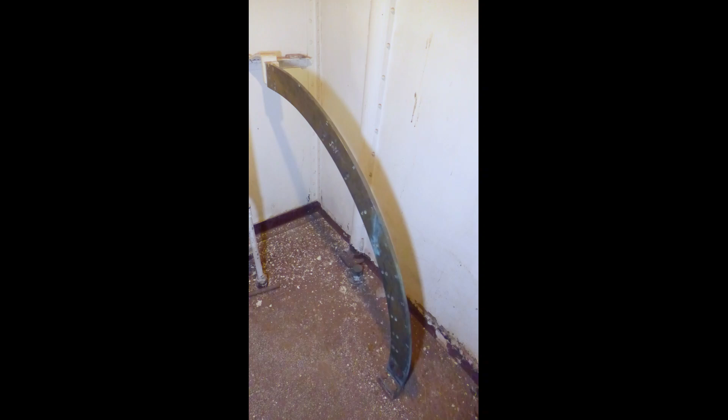So you were asked what the heck this arch was for. Out of the many guesses we received, 2 were correct, and they were spaced very closely together. The first correct one came from Dominic Bosco, so attaboy, Dominic.

Before we dive into this, our goal is to provide a relatively simple description of a very complicated system. This means that we have chosen to disregard a number of fine points such as the effects of temperature and salinity on the density of water. Even though an engineer may be able to pick this apart, keep in mind that most folks aren't really interested in extreme detail, just a general idea of how it worked.

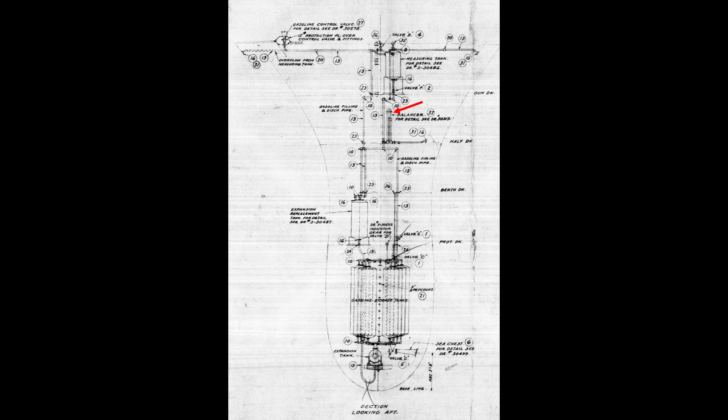The arch was part of a device called a balancer that in turn was part of the hydraulic gasoline fueling system installed in 1925 for the aircraft. The balancer's function was to correct for differences in fuel density made necessary by the way the system worked.

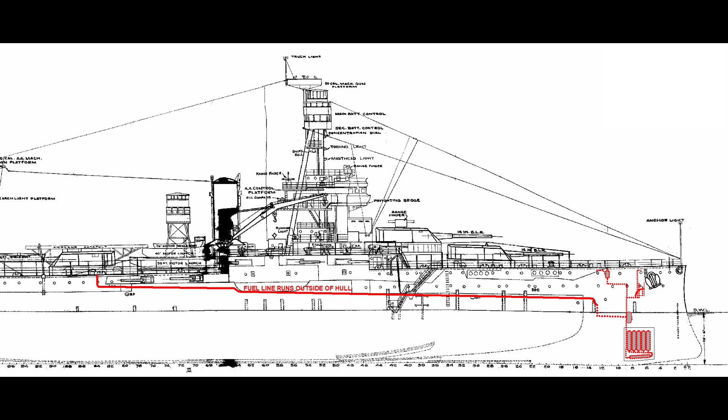This was an extremely clever system that used the weight of water to push gasoline through pipes from tanks located close to the ship's bow to an outlet beside Turret 3 where it was used to fuel aircraft. It took advantage of 2 basic characteristics of gasoline and water. First, gas and water do not mix, and second, water is heavier than gasoline. While the system and its piping was very complicated, its operating principle was quite simple.

Gasoline is stored in tanks close to the bottom of the ship. Any empty space in the tanks is filled with water that also fills all of the pipes above the tanks. At the top of the system was a measuring tank. If you wanted to pump 100 gallons of gas, you put 100 gallons of water into the measuring tank. You then open valves and the weight of the water pushed through the pipes into the bottom of the gas storage tanks where it would push the gas up and out through supply lines.

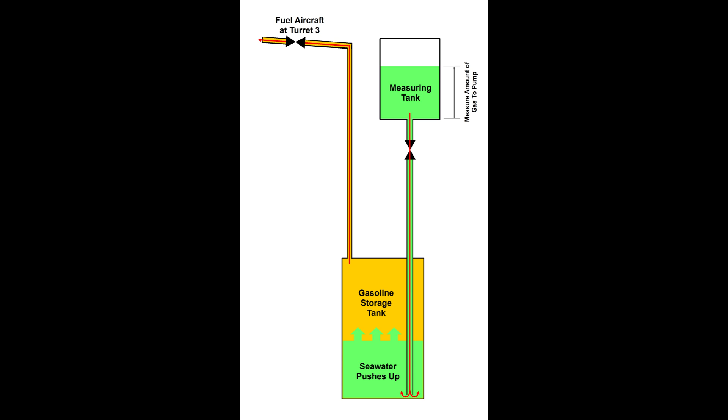Why go to this effort when it would be easy to take a very safe pump and simply suck the fuel out? Gasoline was almost certainly the most dangerous substance stored on the ship. It's far more flammable than fuel oil, and its vapors are extremely explosive. This system kept the tanks and pipes either full of gas or water or both to eliminate empty spaces where explosive vapors could form.

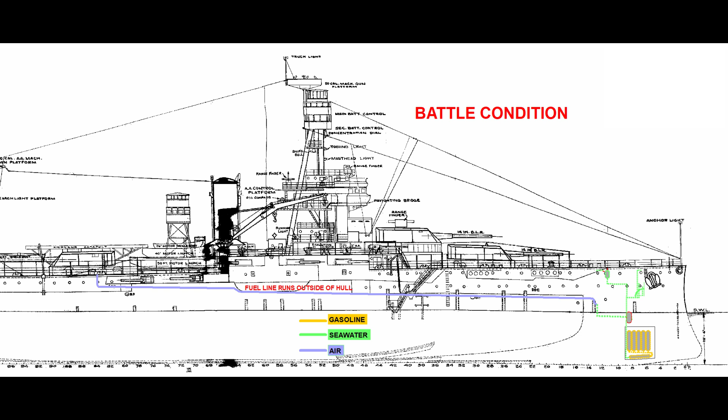For ultimate safety and when setting for battle conditions, they would drain the long fuel line that ran outside of the hull and pump water backwards through the pipes to clear them and push gasoline back into the 12 cylindrical storage tanks. The tanks would then be closed off to isolate the gasoline and protect the ship.

A final protective step was taken. The 12 tanks were located in what was originally a forward trimming tank. Prior to going into action, they flooded that compartment so that the gas tanks were completely immersed in seawater, eliminating the possibility of a gasoline explosion or fire if a tank or a fuel line was ruptured.

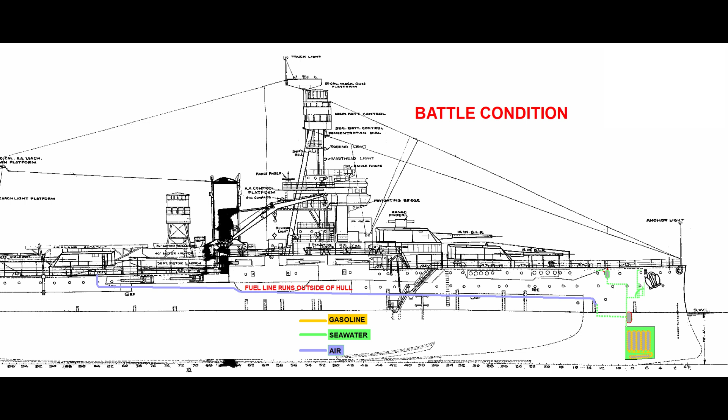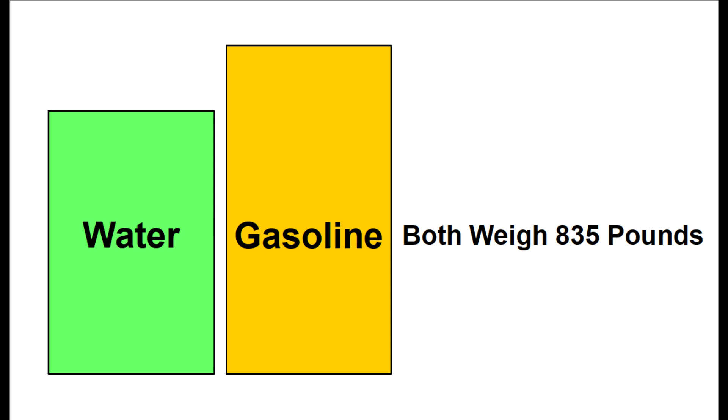So what about the arch and balancer? What did they do? As we said before, gasoline and water will not mix. Since gas is less dense, it will float on top of water. The density of gas also varies by grade or octane rating and manufacturing variations. So there has to be a way to adjust the system to correct for changes in gasoline density.

Here's the basic problem. Let's say that you want 100 gallons of gas, so you use 100 gallons of water to push gas out of its storage tank and through a pipe. What you are doing is using 835 pounds of water to push against the fuel. A little math work tells us that the resulting 835 pounds of gasoline measures out to about 133 gallons, so you end up with 33 gallons more than you want. So in order to set 100 gallons of water so that it will deliver 100 gallons of gasoline, the amount of water has to be reduced by a measurable amount.

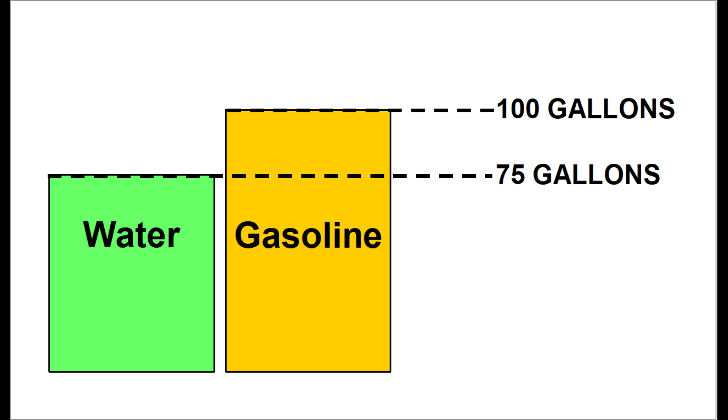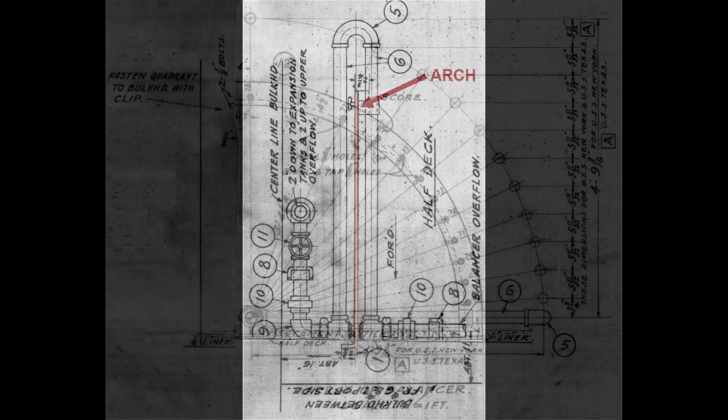The actual balancer is made from a pipe shaped like an inverted U and mounted on swivels that allow it to rotate. Unwanted water could be drained through it to reduce the amount of water used to push against the gasoline. By swiveling to adjust the tilt or height of the loop, it increases or decreases the amount of water in the system, meaning that it can be used to correct for changes in gasoline density and deliver the desired amount of gasoline.

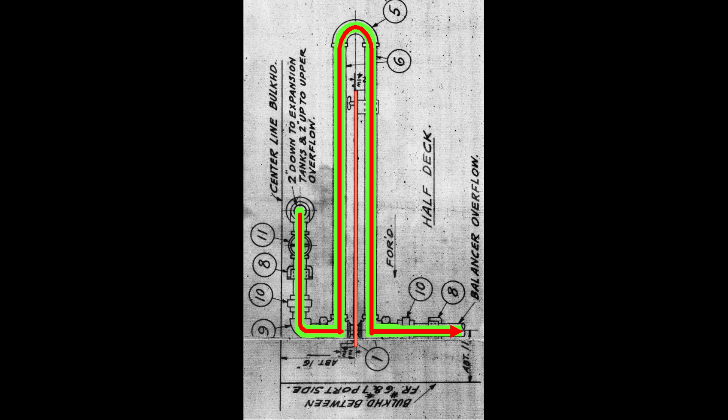Since a decrease in specific gravity of gas increases the amount of it you end up pumping, you need to set the angle of the balancer to a lower angle to drain off more water. The numbers on the side of the arch allow you to set the balancer for the exact density of the gas being pumped. Here we can see the difference in the loop's height when it is set for 0.78 and then again at 0.71.

Think of them as two different settings for a dam spillway. You can see that changing from one to the other will clearly change the amount of water allowed to drain out of the system.

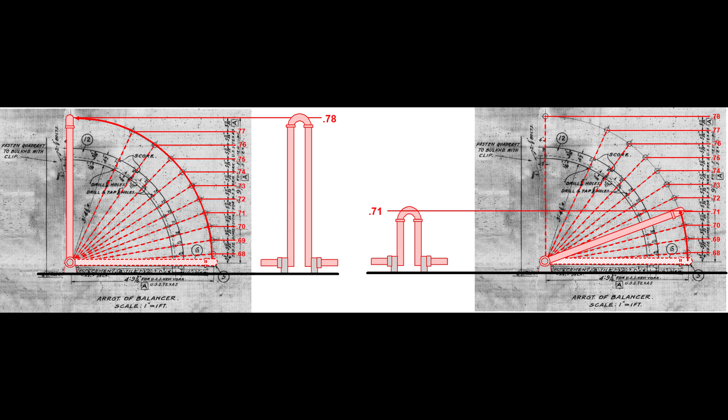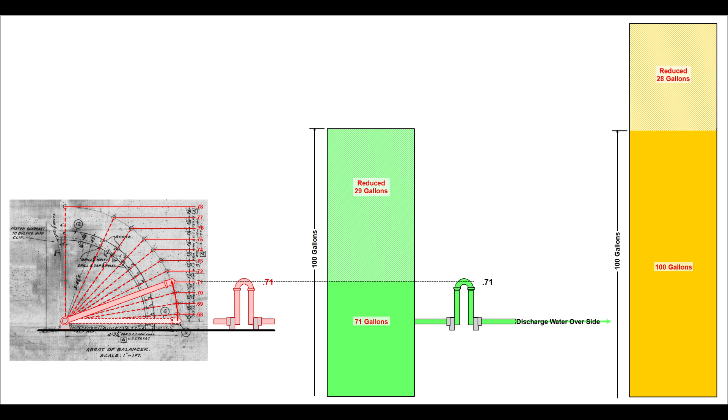The system was extensively modified prior to World War II. While we haven't seen any documentation that tells us why it happened, a couple of reasons come to mind. As a gravity feed system, it would be impossible to pump gas to a level above the balance tank. This would include something like the wing tank of an airplane sitting on top of turret 3. It is also likely that it pumped at a fairly slow rate. The original solution prior to the modification was likely a portable booster pump at the turret end, but there were risks involved with that.

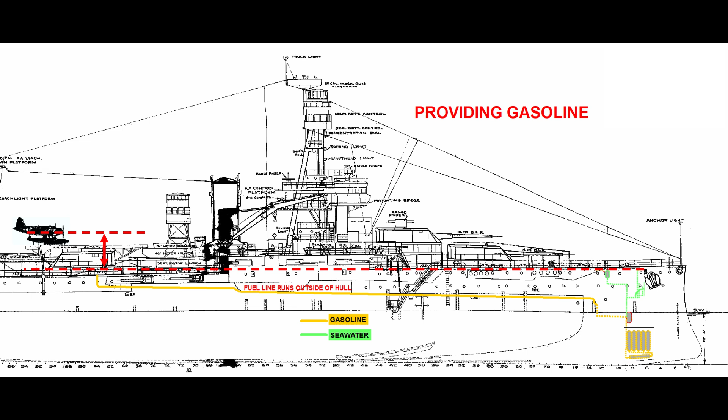Beginning sometime around 1940, the measuring tank was removed and a booster pump was installed. A booster pump could deliver fuel faster and could pump it anywhere it was needed, plus its addition did not compromise system safety. The pump itself was inherently safe because it operated using pressurized seawater from the fire main instead of electricity or steam. The pipes and valves needed to drain lines and purge them with seawater continued to be used, and the gas storage tanks were still filled with seawater as they emptied.

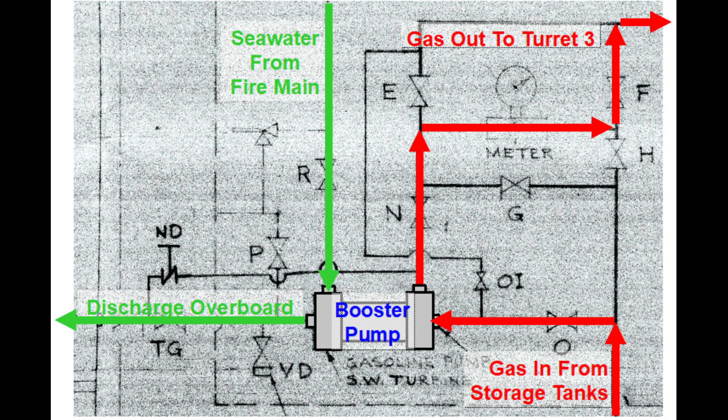So while the original system was rendered obsolete by increasing demands, that does not remove the fact that it was a very clever design that met its original design goals, was incredibly flexible, and most importantly, was very safe.